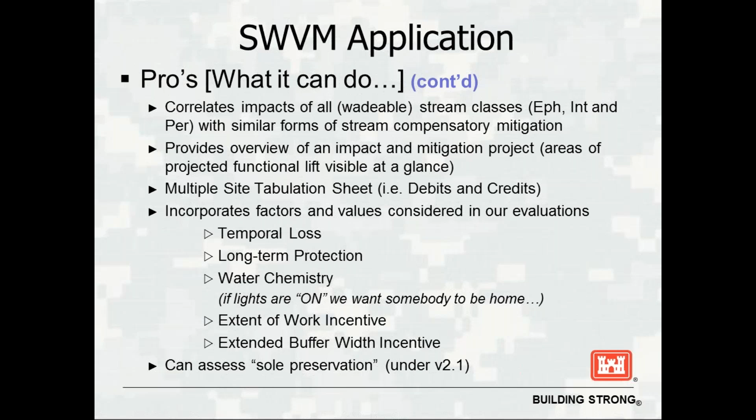I know the screen is hard to read, but the SWVM is available on the web, either through the Pittsburgh or Huntington websites. If you cannot access them, feel free to send me an email, and I can send you the SWVM. It's basically an Excel spreadsheet.

The top half of the spreadsheet is basic information: lat long, where the project is, mitigation length. But we'll go over the columns.

The first column is the impact, so that is the area that you're actually filling. In most cases, it's a fill. The second column, if you're doing permittee responsible mitigation, that would be the area you're going to do your project in; it's baseline conditions. And the last column is what you project that project to be at maturity.

The top half is the HGM, middle half is EPA's rapid bioassessment for habitat, both the high gradient and the low gradient. The next section deals with water chemistry: conductivity, pH, and dissolved oxygen. And then the final section evaluates using the West Virginia Stream Condition Index, which is an aquatic benthos index.

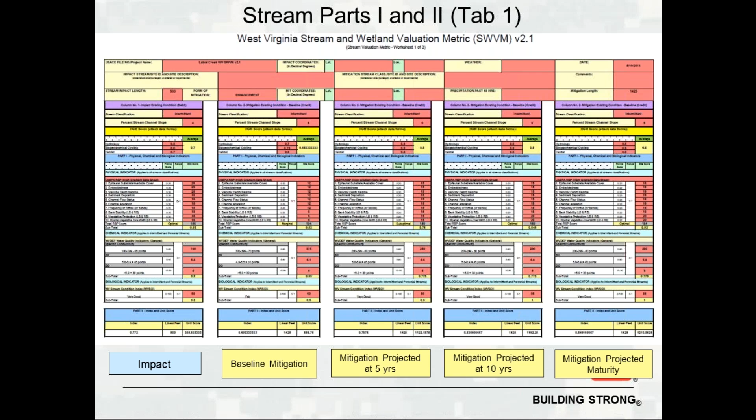Just a little bit of a close-up, like I was saying before. It's broken up into four sections. The top half is the HGM, which was developed by the Corps of Engineers at the ERDC lab. Then EPA's rapid bioassessment protocols for wadable streams, West Virginia DEP's water quality indicators, and our West Virginia Stream Condition Index, which is basically an IBI for aquatic insects.

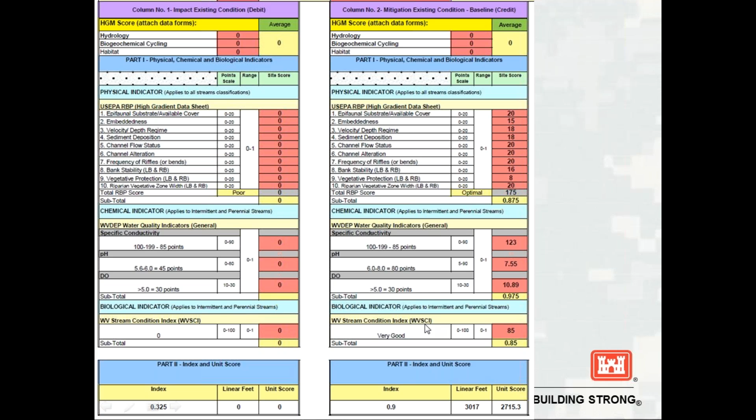If you go into the actual SWIM, there's a second page, which goes into some of the incentives or some of the other fields that go in there.

Temporal loss to construction, which is basically if you have a project and it's going to be 2 years before you're able to start your mitigation, you would put 2. If you're going to do your mitigation concurrently, it would be 0. If you're going to use a mitigation bank, we allow you to put 0 into that field.

If you're going to use the in-lieu fee program, you would put 4 years into that space, basically because it generally takes our in-lieu fee 2 years to get the ball rolling, another year or so to actually get the project on the ground once they receive the monies. So you're looking at about 4 years delay between the time the impact happens and the time mitigation actually gets put on the ground.

We also have temporal loss to maturity. This is basically for permittee responsible mitigation projects; that is a 0 if you're using banks or in-lieu fee. This is basically for the credit side of things, so when you're trying to calculate the credits or the debits that you're responsible for. And there's a long-term protection.

So basically we've determined that long-term is 100 years, so anything over 100 years we consider forever. But in West Virginia, given the amount of mining and stuff we have, we can't always have 100 years of protection. So there is an avenue that if you only have 20 years of protection, but there is a penalty to pay.

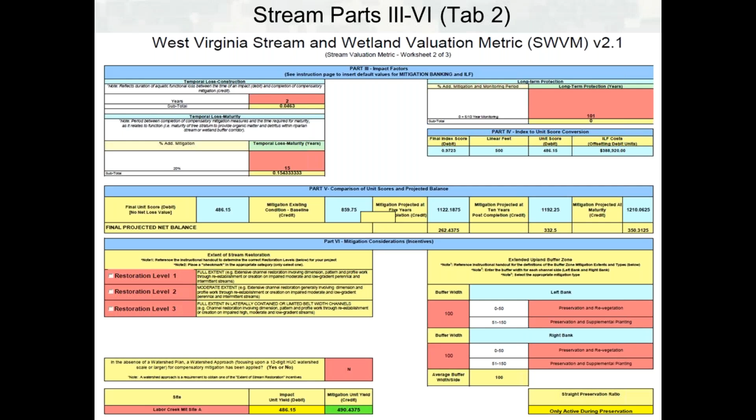The other part of this is the HGM, which was developed by ERDC. It is a bit more data intensive, where you actually collect data and put it into a spreadsheet, as opposed to EPA's rapid bioassessment, which is a visual assessment leading to a bit of judgment. The HGM doesn't have quite that level of subjectivity.

What it also allows you to do is sort of double check. So if your HGM says you have a very high quality system, but your EPA rapid assessment says it's marginal, it gives you a good indication that you need to look at it a little closer. But it's split into hydrology, biogeochemical cycling, and habitat.

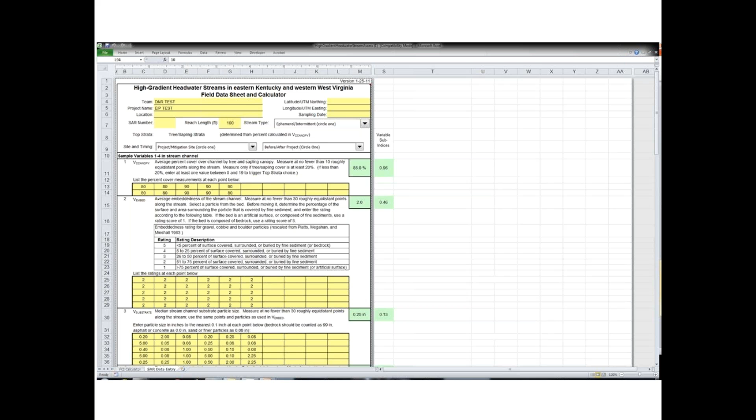Now, as you can see on the HGM screen, it is data driven. So as you enter the data, the spreadsheet will actually calculate the values for you. It's pretty simple to fill out, and a relatively simple time frame of getting that information in there.

Like I said before, it's broken down into physical, chemical, and biological, basically using aquatic insects in the physical parameters. Scored on a basic 0 to 1 scale, 0 being the LA ditch, and 1 being your standard reference streams.

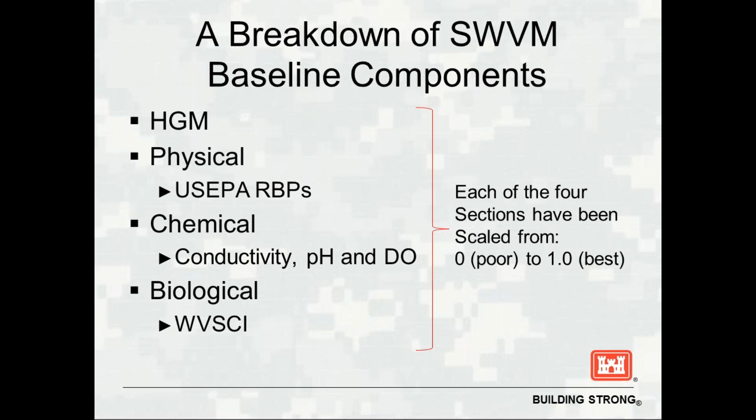Once you put all the information into the spreadsheet, it will actually calculate your debits and credits, but it's based on a percentage of each of those components. If you use the HGM part, it's 50% HGM, then 50% the rest of the SWIM, and then within that SWIM, it's 1/3, 1/3, 1/3.

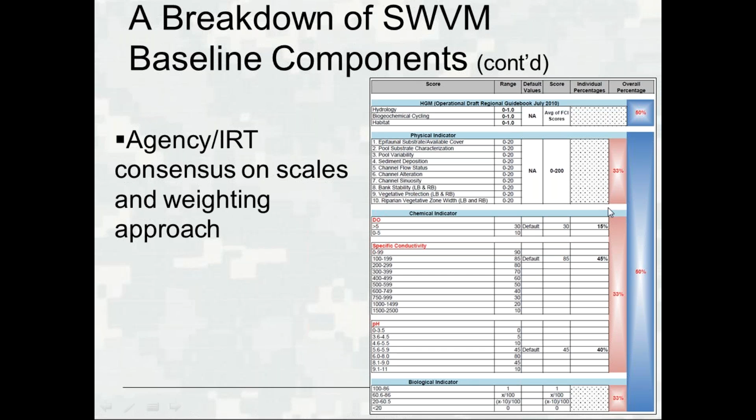Just giving you some breakdowns of how we calculated that. Don't need to go over that line by line, but probably the key to look at is the restoration levels. So basically, once it grinds the numbers, it goes to the incentive levels.

So if you're doing level 1 restoration, we basically give you a 100% jump. And that was to strongly encourage our consultants to do high-level restoration. So if they're doing changes in dimension, pattern, profile, they're going to get more credits for their work. And fully realizing that requires quite a bit of front-end work on the design.

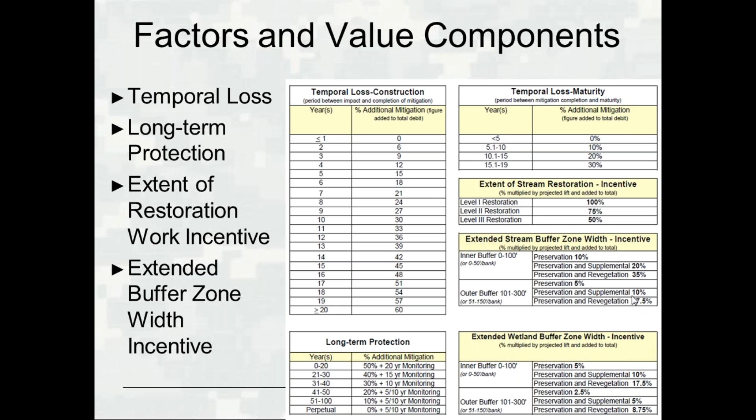Try to incentivize them to actually do the design that they need to do. Again, we're not going to accept level 1 restoration on an ephemeral high gradient stream, and just giving you a little bit of idea of what those incentive levels are and what it takes to get those incentive levels.

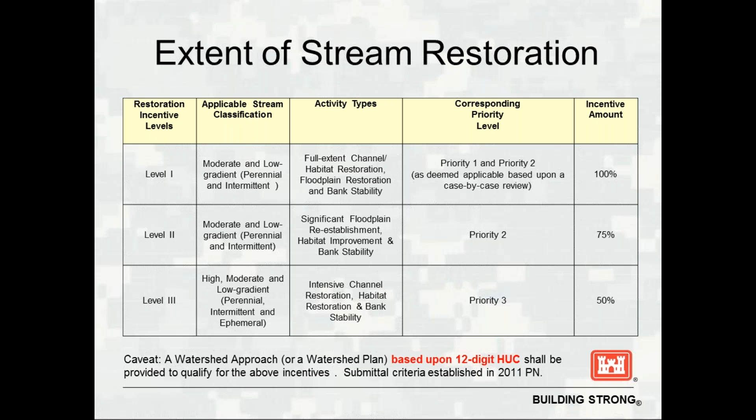Most of our consultants on our mitigation banks are doing level 1 restoration. Probably 75% of the bank will be level 1 with about 25% on level 2. Our permittee responsible mitigation projects generally focus more on the level 2 and level 3 restoration.

We do allow stream preservation to generate credits, and that's based on a ratio based on the value or the functional value of that stream. We only accept for preservation streams that score 0.80 or above. So these are very high quality systems. And with the higher quality, the greater credit that are generated.

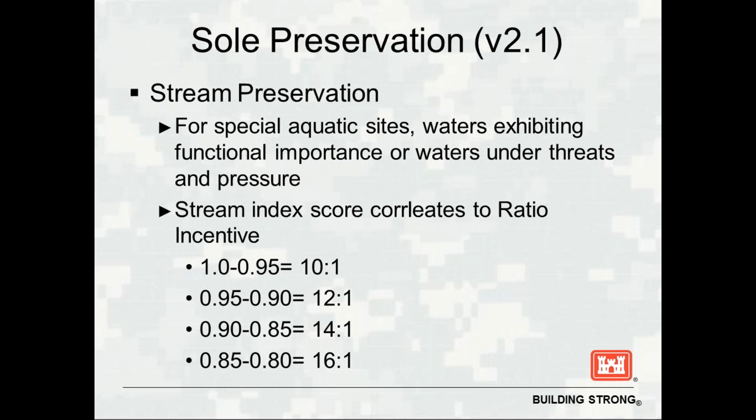We generally try to stay, we don't want any of our banks to have more than 30%, give or take, of the total credits being generated by preservation. We can, on exceptional systems, go higher than that, but generally 30% is our rule of thumb on the amount that we want our banks to have in preservation credits.

And that about does it. So, the total goal is to try to get cows out of the stream and restore our systems, and adequately compensate the state and the citizens for impacts that occur, whether it's mining, pipelines, or Walmarts.

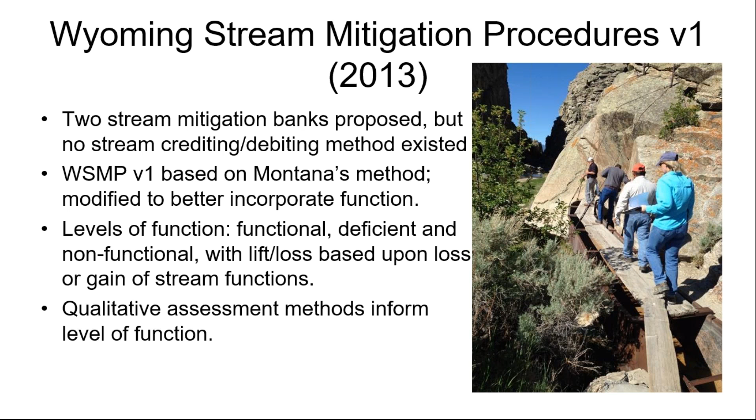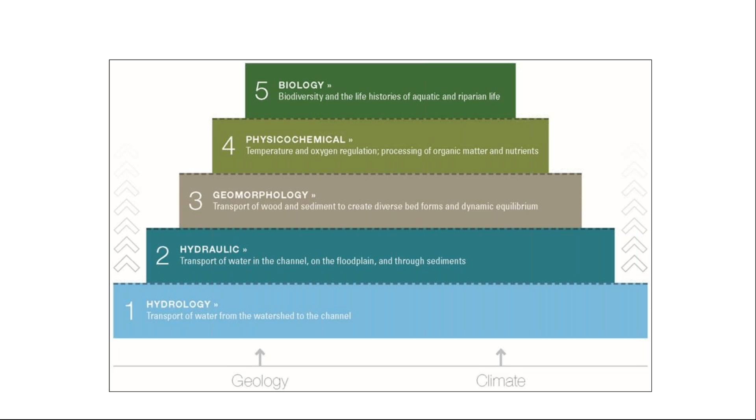The IRT really liked this approach and felt like it represented a good organizational framework and a really good communication tool for thinking about the various functions occurring in streams, and really thinking about ways that these functions are interrelated. So for those not familiar, this is the stream functions pyramid mentioned in this document. It's an organizational framework to help think of the various functions that a stream provides and how the various functions relate to each other within a stream system.

So here's what the original Wyoming stream mitigation procedures looked like.

And can you guys see my pointer? I don't know if you can, but essentially on the debit side... We can see your pointer. Yeah. Excellent. Okay.

So we looked at using these qualitative assessment methods to define what the existing condition was in these three categories: non-functional, deficient, or functional. And then we looked at the type of loss as it related to functions. So partial functional loss would be one or more stream functions degraded by an impact. Full functional loss would be that most of the functions would be impaired or lost at an impact site.

And then similarly on the mitigation side, we looked at incorporating multipliers for net riparian and stream improvement tied to the magnitude of lift that we anticipated at a site. So substantial was defined as moving from a non-functioning category to a fully functioning category of condition. Moderate would be moving from non-functional to deficient, or deficient to functional.

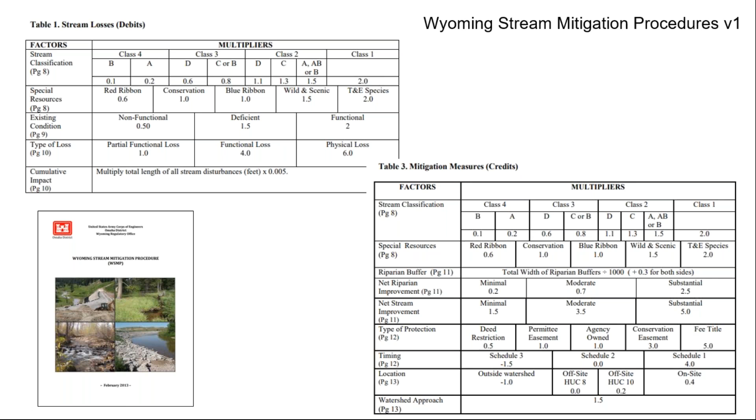So how did this work out for us? Once we developed the stream mitigation procedures in 2013, one of the banks moved forward to develop and finalize their mitigation banking instrument. And as we were working through the MBI process, there was some discomfort on the IRT in relying on these qualitative assessments alone to inform how much lift was happening on the site.

These qualitative methods are fairly rapid and subjective, and they lack repeatability from one practitioner to another. And so there was some level of discomfort in relying on this for the mitigation bank site to receive credit for the lift they were anticipating.

And so what we ended up doing for the mitigation banking instrument was adding quantitative performance standards that would support the assessment conclusions. So we looked to the stream functions pyramid framework document for ideas, and we pulled out some quantitative measures and incorporated them as performance standards within the banking instrument.

And then after the bank was approved, collectively, I think the IRT thought, well, there's got to be a better way that we can do this. And so we kept talking about the need for moving to more quantitative approaches to describe stream function. And around the same time, Will Harman with Stream Mechanics had been working with the Environmental Defense Fund in North Carolina to develop a stream quantification tool, which was really a spreadsheet calculator that was an outgrowth of the stream functions pyramid framework work that he had done.

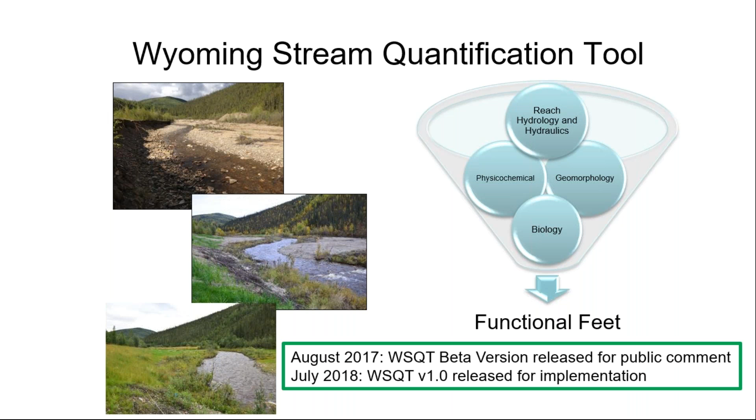So we started this process, I think, back in 2016, and by August of 2017, we had a beta version of the Wyoming stream quantification tool. We released that for public comment and beta testing, and then made some pretty substantial revisions following that period. We got a lot of really good, meaningful feedback from folks, and were able to make some very constructive revisions to version 1, which we released last July for implementation in Wyoming.

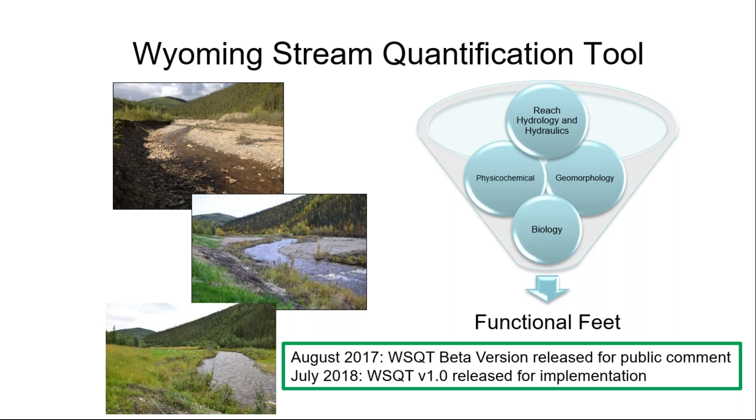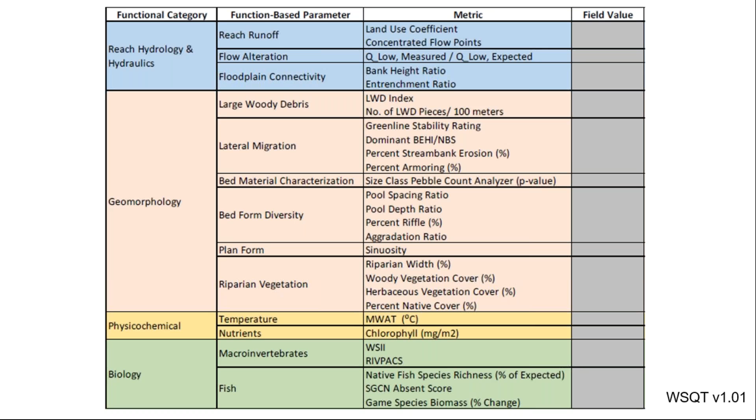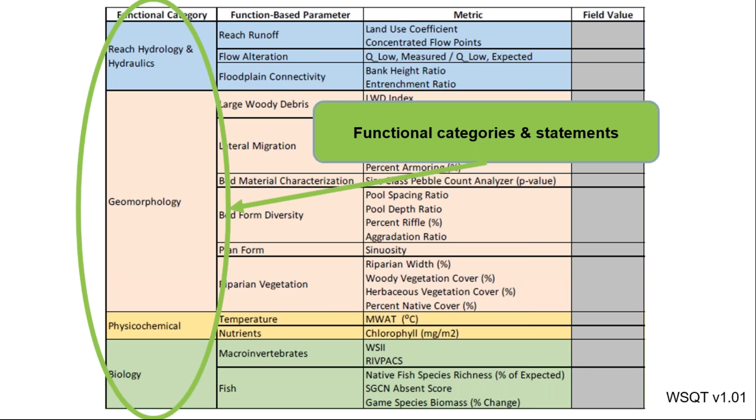And so just a quick tour of the stream quantification tool. It's organized very similar to the pyramid itself. So here you have your functional categories. In the Wyoming stream quantification tool, we combined the hydrology and hydraulics so that we had a more balanced approach to scoring. So we have 4 functional categories.

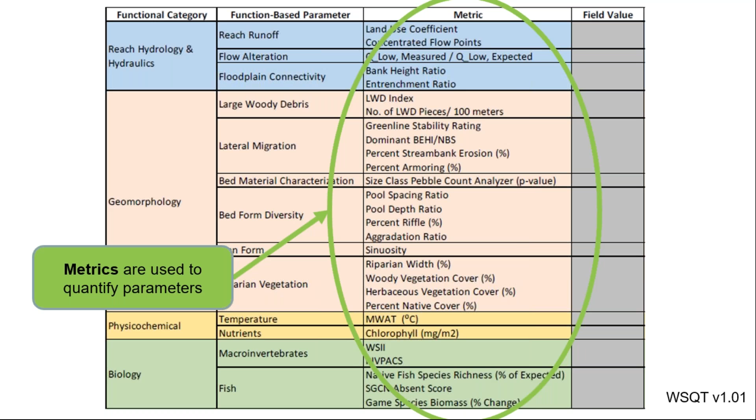And then within each of the functional categories, we have multiple parameters. These parameters describe and support the functional statements. And then for each of the parameters, we have metrics. Metrics are the actual measurements that you take in the stream to generate the score. And so these are the various metrics that are included in the Wyoming stream quantification tool. And then lastly, when you enter a field value, it converts it to an index value. And we have reference curves that we used.

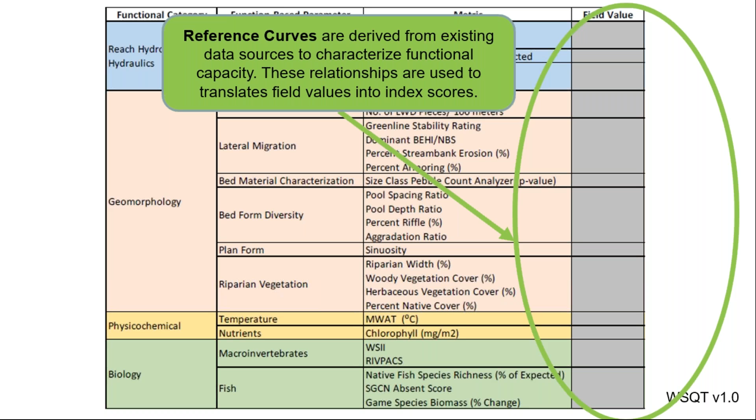We derived these from existing data sources that characterize the functional capacity of the system. So basically, it translates all the field values and all the different measurements from these different metrics and approaches and assigns them an index value on a 0 to 1 scale, 0 being no function is provided, and 1.0 being the tip-top reference standard condition. And so this is really data-driven, which is exciting.

And so the way that scoring works in the tool is pretty simple, so that we have the flexibility to add and subtract or adjust the metrics based on specific project goals and objectives. Or, in the future, when we update the tool, we don't have to go back and rework all the scoring based upon how things balance in there.

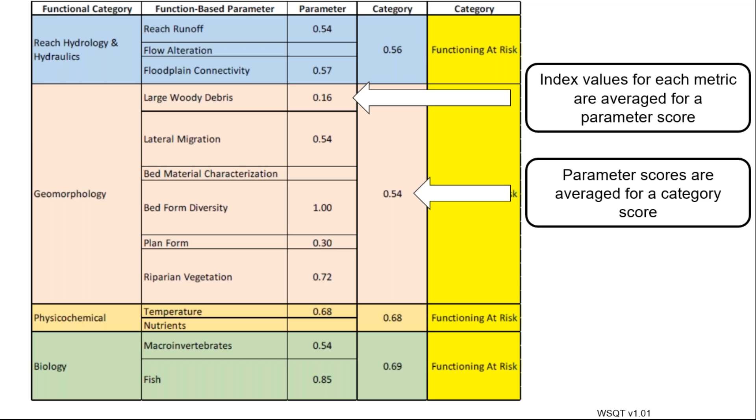So it's pretty straightforward. Index values for each metric are averaged for a parameter score if there's more than one metric within that parameter. And then the parameter scores are averaged where more than one parameter is filled in to get a category score. And then the category scores are weighted and summed to create an overall reach score. So reach hydrology and hydraulics is 30%, geomorphology is 30%, physicochemical and biology are 20% each.

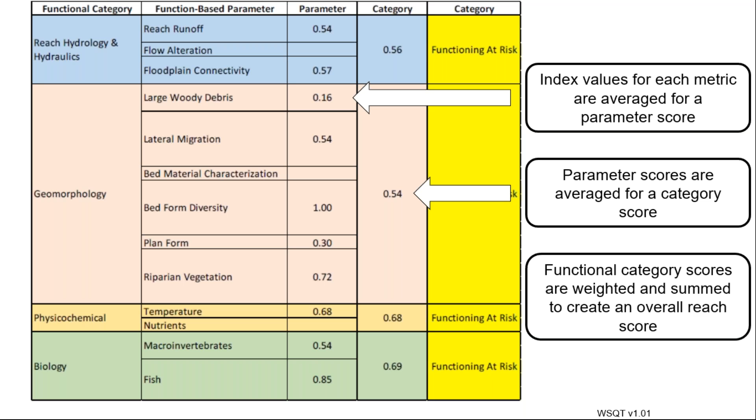If physicochemical and biology parameters are not measured, then that limits the overall potential score that you can achieve to 60% of the total. So this, in a way, incentivizes people to monitor physicochemical and biological parameters at a mitigation or restoration site, so that they can get credit for achieving lift in those categories as well.

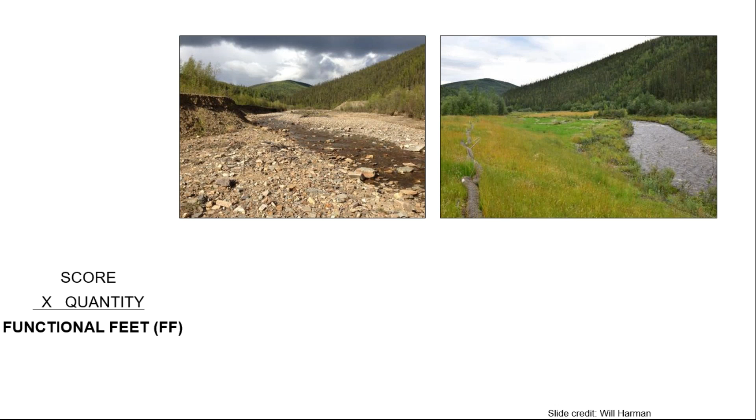And so just to walk through an example, I mentioned that functional feet was calculated by taking the score and then multiplying it by the project size. For the purposes of this, we use stream length. So here you have a site. This is an example of Wills from up in Alaska. The existing condition score at this site came in at 0.21, and the existing stream length was 1,600 feet. You multiply those together, and you get a functional foot score of 336 functional feet.

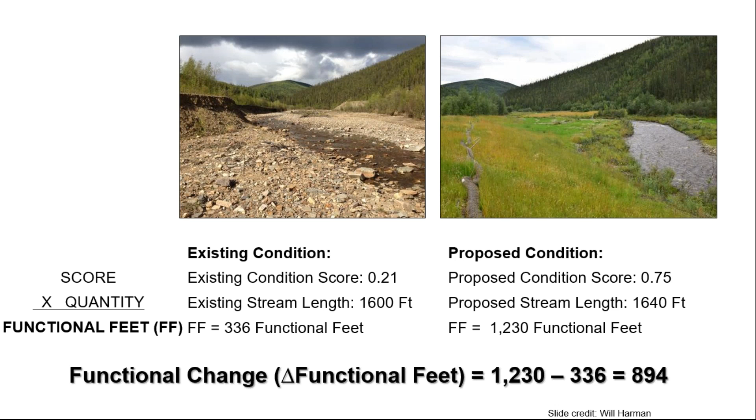So the proposed condition was much higher. The proposed condition score was predicted to be 0.75. Because of the work that they did, they added an additional 40 linear feet of stream, which led to a proposed condition functional foot value of 1,230 functional feet. And so what we do with that is we look at the difference between the proposed and the existing condition scores, that delta, to calculate the functional change. In this case, it's 894.

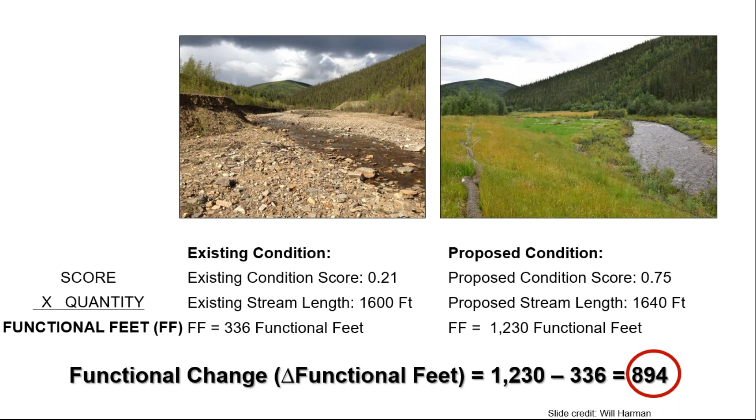And that delta, or that change in the functional feet, becomes the basis for talking about debits and credits now in Wyoming. So just a general summary of the SQT. It's really intended to calculate functional loss and lift associated with stream impacts and restoration projects by quantifying changes between existing and future stream condition of the site. It is intended to look at the difference between an existing and a proposed condition score to inform permitting and mitigation decisions. It can also be used to develop monitoring plans and set performance standards.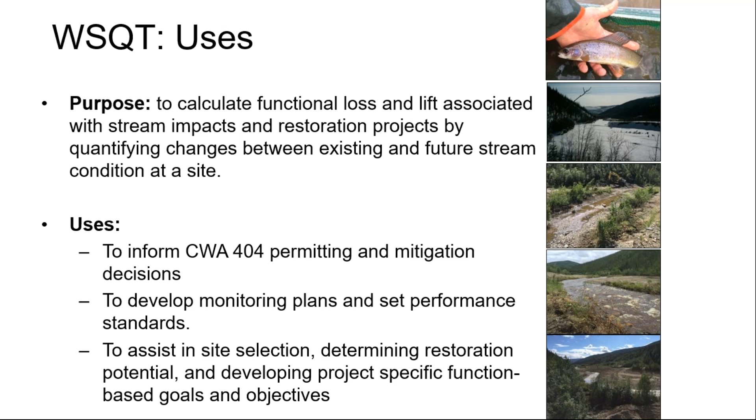It also has other uses that relate to planning of project sites and setting project-specific function-based goals and objectives. All of that is also outlined in the user manual for the SQT. So as I mentioned, the SQT itself is a workbook that is used and applied at a specific project site. There are a few things that accompany the SQT. One is the user manual, which explains how to enter information into the spreadsheet, and it also includes information on how to collect data at a site and calculate the metrics that go into the SQT.

We also have the scientific support document, which explains how we derive the index values for each of the metrics in the tool. I mentioned the reference curves, and this document really explains how we developed the reference curves, defined the index values, and it also provides other background on how things are weighted in the tool. And then, importantly, the tool needs to have a place where it sits and a document that explains how it's going to be used.

So once we developed the stream quantification tool itself, the team went back and revised the Wyoming stream mitigation procedures. Version 2 of the Wyoming stream mitigation procedures rolled out along with the tool in 2018, last summer. And this is just a look at what the new table in the stream mitigation procedures looks like.

So the SMP version 2 still includes a table that looks at adjustment factors for debits and credits. It's been simplified. We took out a lot of the things that we thought were already accounted for in the tool. For example, buffer. We have a riparian width metric, so the width of the riparian area that is protected and restored is accounted for in the functional foot calculations within the tool. And so that was something that we were able to take out of the adjustment table.

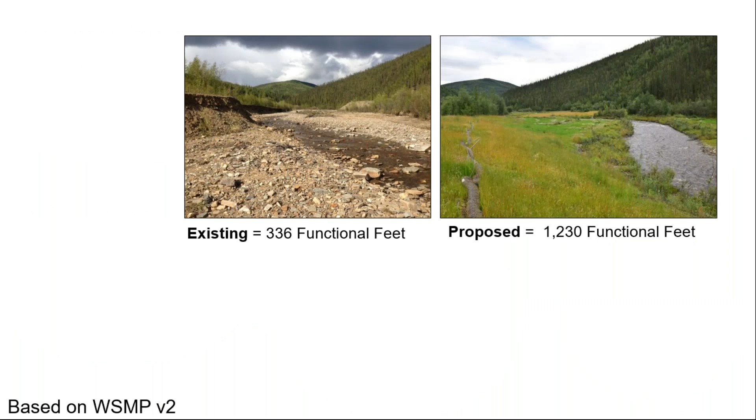So if we go back to the example that we walked through before and run it through as a mitigation scenario. Let's say this is a proposed bank site. Let's say it's in a conservation watershed. The sponsor is going to apply a conservation easement with an additional buffer area that extends outside of the riparian width. And they're also proposing that 20% of credits be available as advance credits. Let's figure out what credits they would get at the site.

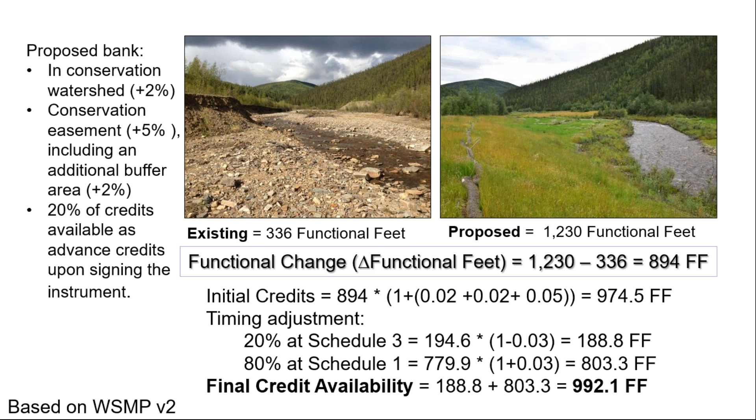As I mentioned, the foundational unit is this change in functional feet, and that's 894 functional feet. Then we would take that and consider the multipliers, the 2, the 5, and the 2%. And so you would get an adjustment factor on that. And then you have your timing adjustments based on the various schedules of credit availability. So essentially your final credit availability in this example would be 992.1 functional feet. And that is the amount of credit that you would have at the site.

And so that is really all I have to present to you today. I look forward to answering any questions.

Thank you so much. That was a really great review of the methodology. I do have a few questions for you, Julia. The first is, who measures the baseline water quality parameters? Is it the consultant or the state? And if it's the consultant, are they given state-approved water monitoring protocols or QA/QC procedures?

Yeah, so it would be the practitioner that would collect all the baseline data at the site. The user manual for the Wyoming stream mitigation procedures includes Appendix A, which includes all the data collection methods. A lot of these were pulled directly from Wyoming DEQ standard operating procedures, which have QA/QC protocols incorporated. Great, thanks. Hope that answers that question.

And then there's another question about the adjustment factors: is there documentation for the adjustment factors? Is that included in the procedures as well? Yeah, so the stream mitigation procedures document defines all of the various adjustment factors and how the percentages would be applied.

Excellent. Okay, so roughly how long would you estimate that it would take to develop and implement this approach in an area that currently does not have it? So how long was the process? So the process in Wyoming took us probably two years, I think, from the start to having an implementation version of the tool. In Colorado, we're currently building off of Wyoming's tool. From when the Wyoming version 1 came out, we're probably a year behind them. We're about to put out the Colorado version of the tool.

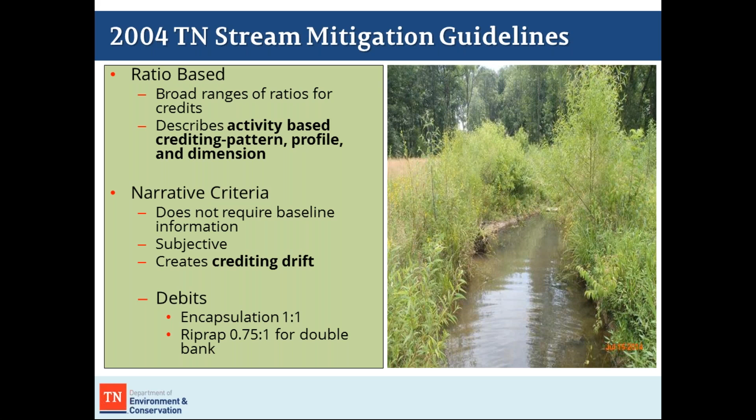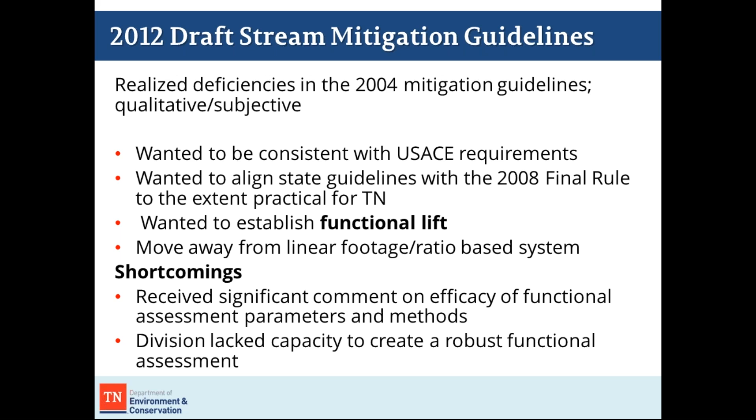We rewrote the stream mitigation guidelines in 2012 and released them to the public, and it didn't go over so well. We did it because we wanted to try to be consistent with the Corps requirements and align with the 2008 federal mitigation rule. We wanted to establish functional lift and move away from a linear footage at ratio-based system, but we didn't do it as a collaborative approach, and we therefore lacked the capacity in-house within the state to create a robust functional assessment system. So we had to go back to the drawing board.

And when our leadership approached us with this issue, they really said we needed some strategic planning in order to implement a good program that captured everybody's goals and was inclusive of all of our stakeholders. We have customer-focused government, so including our customers in the process was a priority.

So we worked on a method to engage our stakeholders before we selected the methodologies that we were going to use. And then we worked with the IRT to evaluate all of the potential assessment methods that were out there. And then we established parallel pathways. While we were developing the tools and gathering data, we were also routinely doing education and outreach to our stakeholders and our internal staff so that everybody knew what was happening and when.

It took us about 6 or 8 months through the IRT exploration process to select the stream quantification tool that Julia described as our primary option, as our go-to option for really becoming the tool to help us evaluate credits and debits. The benefits of the SQT was that it was numerical, and it determined the difference between existing and proposed condition.

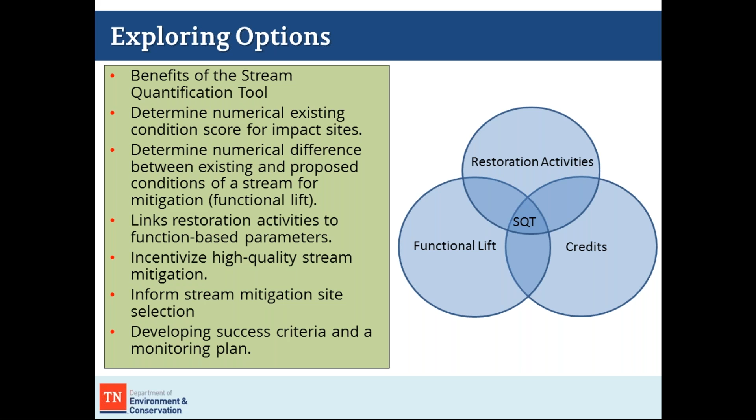With that tool in mind, we developed a suite of long-term and short-term goals to help us complete the process. I know one of the questions in the audience was, how long did this take? For Tennessee, it's taken us 6 years.

We have a robust permittee lobbying group. Our Department of Transportation and other impactors are really robust and active and wanted to be part of the process. We had a lot of political interest in the process. And then we have 2 separate Corps districts, the Memphis district and the Nashville district. We had to make sure that collaborative partnership was aligned, and then all of the other agencies that were involved.

So with that in mind, our long-term goals were really to develop a tool that could work for all, and it was a stream function assessment to capture lift and a companion debit calculator. With that, we knew we needed to update the stream mitigation guidelines, and we wanted to update TDEC rules on mitigation. This would require 2 sets of rule changes, the water quality standards and the aquatic resource alteration permitting rules.

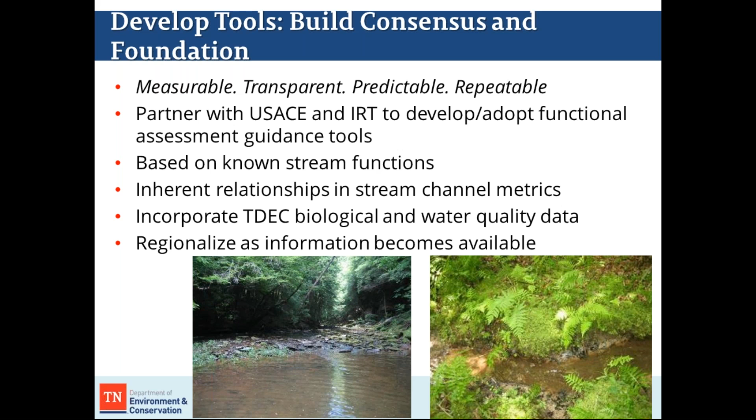So first off was to develop tools. For our stream quantification tool, we knew that we wanted to gather data that we already had and partner with the IRT and other agencies to access and use that data to build our reference standards, and also collect data that we didn't have. And that was going to help us regionalize the SQT to make it unique for Tennessee.

In our data gathering and analysis efforts, we spent about 18 months building regional curves, hydraulic geometry relationships, collecting information on unique bed forms across the state, riparian vegetation, and then mining the data that we had for biology and water quality for about the past 20 years.

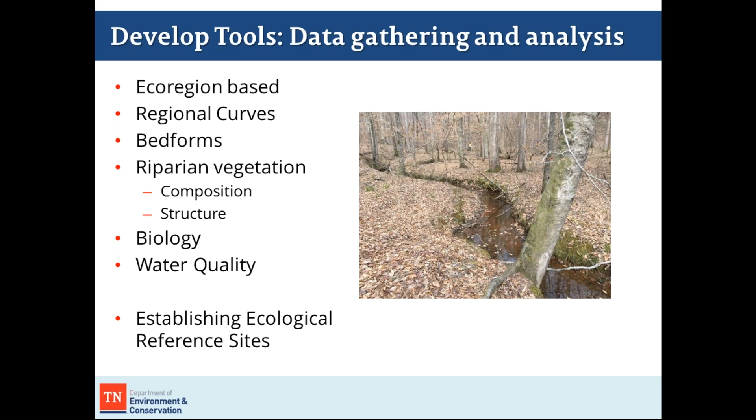We also collected large woody debris information, and once we had our regional curve sites established, we went back and collected biology and water quality at those sites also, establishing ecological reference sites.

So with that, we had over 120 ecological reference sites across the state with multiple levels of data. Some were primarily morphological, some primarily biology and water quality, but nearly 60% of those sites have reference data for all 5 stream categories, from hydrology all the way down to biology. It was important for our leadership that they felt we had a robust set of data to build our reference curves on for the stream quantification tool.

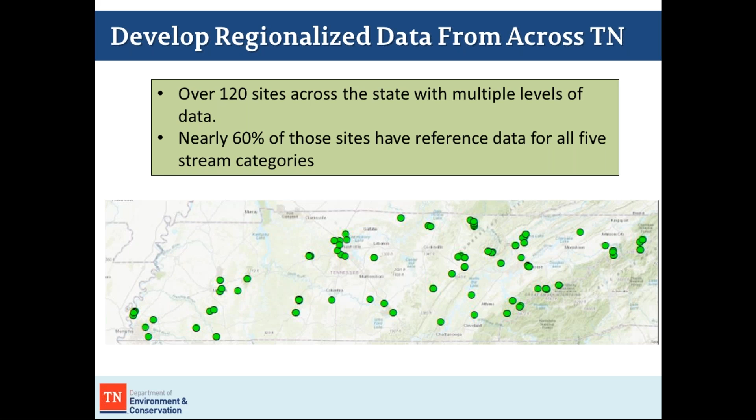Once we had the data, we began to build those reference curves that Julia talked about, and it was an iterative and incremental regionalization process. So what that meant was, after we had determined as a team what stream category parameters we were going to use in the SQT, we had a mitigation assessment team, an internal working group with the IRT, pore over the data and help develop those curves based on the information that we had.

We reviewed and analyzed existing data, gathered new data, and once those reference standards were established, we would send that information out to the Stream Design Review Group and the members of the IRT. Those groups would review that information and give us feedback, and then we would refine those curves and build that information into the tool. We had several beta versions of the tool that we public noticed. I think we had 2 rounds of comments on the SQT before the final version was released.

For streamlining the process and communicating change, we developed a series of workshops that we delivered across the state for all stakeholders that focused on small changes and also introduced the concepts of the big change to keep that open line of communication. We had webinars where Will Harmon actually provided the education. We had workshops where we took practitioners in the field and discussed measurement methods. And we slow walked the process so that everybody felt comfortable.

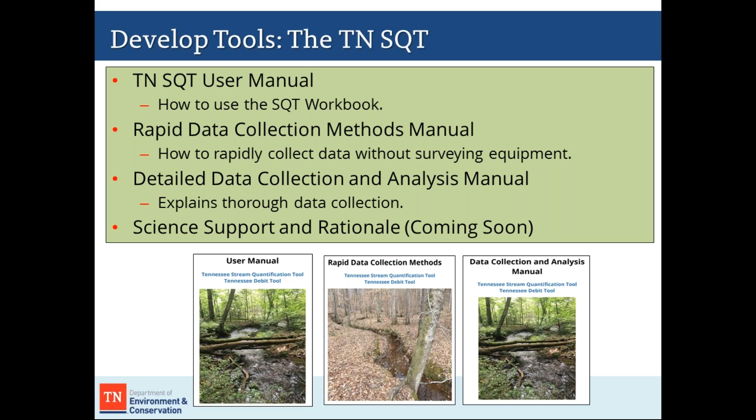I know that there was a question in the audience about the time commitment for collecting the data. The rapid methods, we say, takes approximately 2 hours. The water quality and biology component of that can be collected by the state. If the practitioner would like to collect that data, the manual describes how you need to use the TDEC QSSOP for macroinvertebrate data collection, and make sure that you're a qualified biologist able to conduct that assessment. The detailed method, that's about an 8-hour process.

Our Tennessee stream quantification tool looks very much like Wyoming's. For our workbooks, we have multiple tabs where, with the project assessment, a watershed assessment page, your parameter selection guide, which tells you based on your site if you should be using parameters for large woody debris or bed form diversity. The quantification tool itself is the actual calculator, and then we have additional tabs that allow monitoring data and a data summary of your site over time, followed by the final tab, which is reference standards.

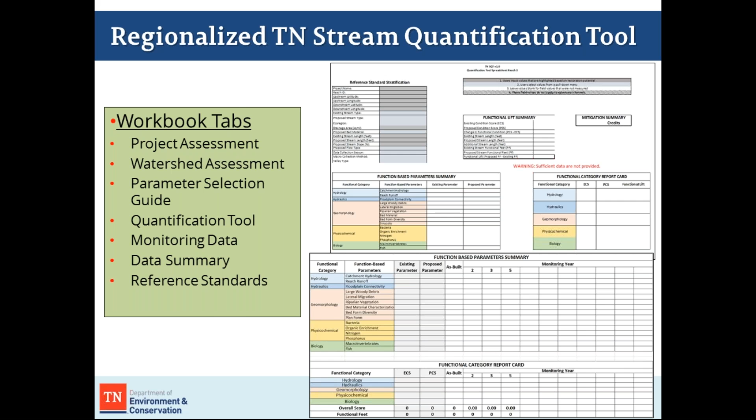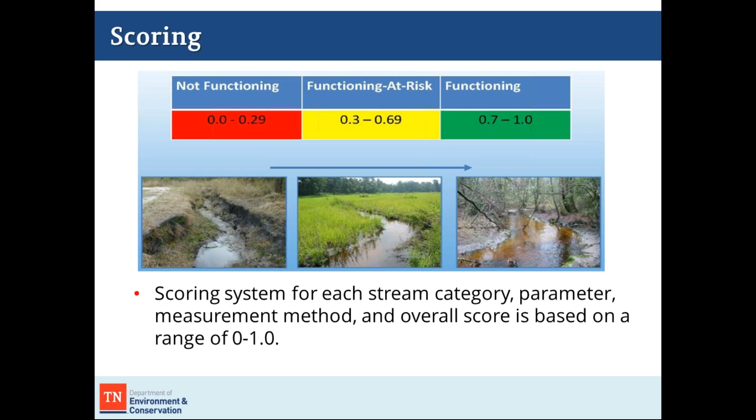Our scoring is just like Danny and Julia's. It's on a 0 to 1 scale, and it's broken into easily recognizable color categories of red, yellow, and green for not functioning, functioning at risk, and functioning. This is important to remember when we discuss the Debit tool in a few.

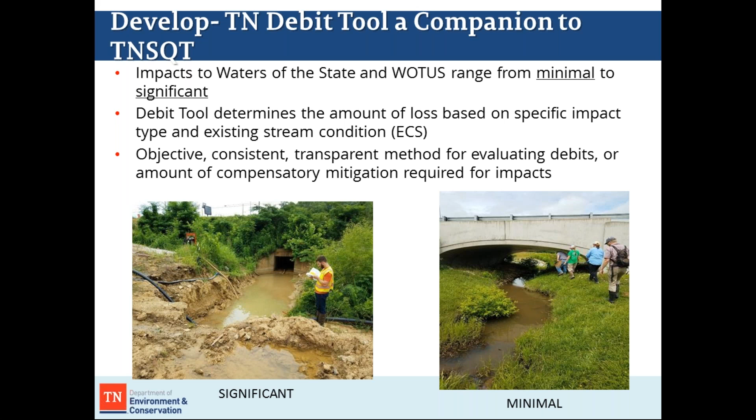So when we had the SQT finished, it then became apparent that we needed to develop a companion tool, because expecting applicants to go out and use the stream quantification tool to project the functional loss at their site may be more challenging than we wanted to make it. So we did a very similar process based on the same logic model as the SQT, but kind of in reverse.

The Debit tool is a spreadsheet calculator, just like the stream quantification tool, and written guidance. It has two additional components, though.

It has something called an existing condition score, which you have for the SQT, but what we have here is an ability to either complete all of the metrics, or option 2, which is probably going to be the most popular option for applicants, will be estimating your field assessment scores, which means you gather data for some metrics but not others.

And then if you're not capable of collecting all of the data based on skill or time, you can take the standard existing condition score, and we tier that for a 1.0 for exceptional Tennessee waters or outstanding national resource waters. A general stream would have an existing condition score of 0.8, and an ephemeral channel of standard condition would have an existing condition score of 0.32.

You couple the existing condition score with the impact severity tier, and that is tiers of impacts based on type and description and projected functional loss, to get the debits that you would be owed.

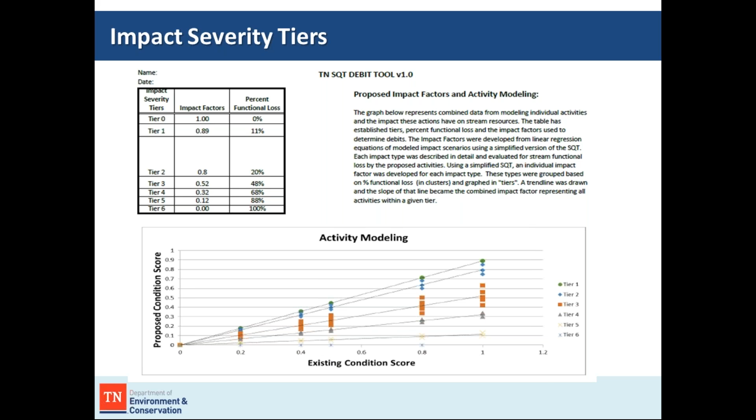The impact severity tiers were developed through a combination of modeling of activities to determine functional loss, and then some regression equations to develop impact factors based on those activities. And I'll just briefly buzz through these.

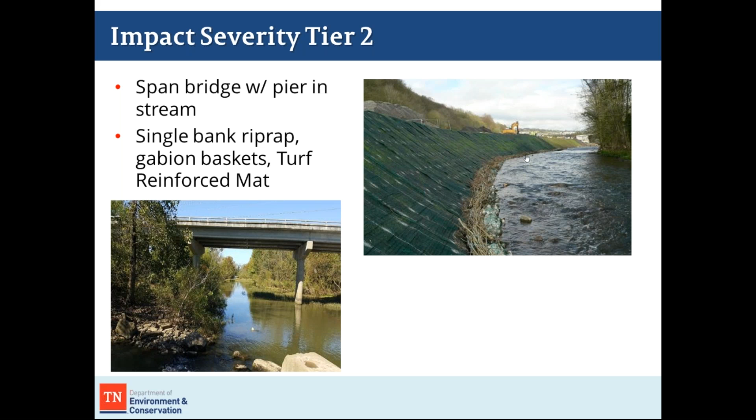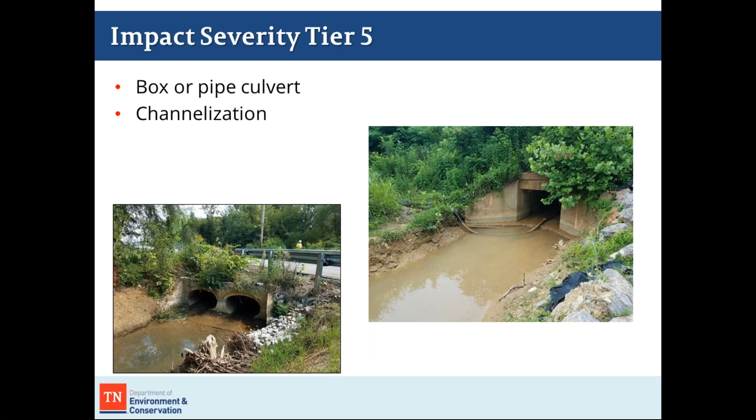We have tiers ranging from 0 to 6 that represent minimal to no loss. And as you climb in number for impact severity tier, so does the amount of loss that you will see occur for the resource. I didn't list impact severity tier 6 because that's basically stream fill.

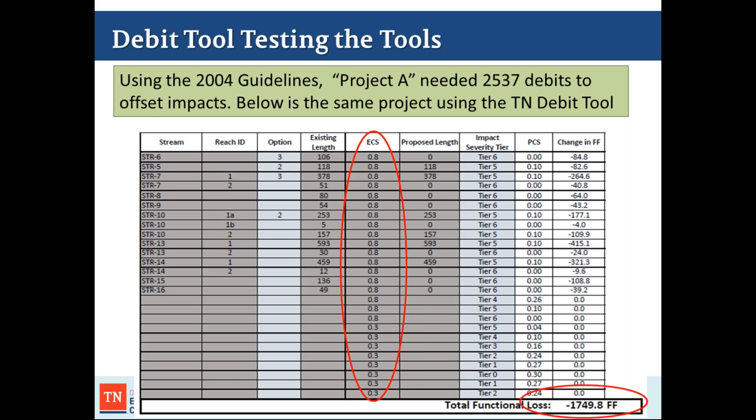We tested the Debit tool with a whole bunch of the Department of Transportation projects to see how it worked. We saw that under the 2004 mitigation guidelines, a project needed 2,500 debits. Using our model that helps better capture functional loss at an existing condition score of a high quality stream, the debits went down significantly. Once we did an estimated existing condition score, that option 3, and measured some parameters but not others, we saw an even bigger drop.

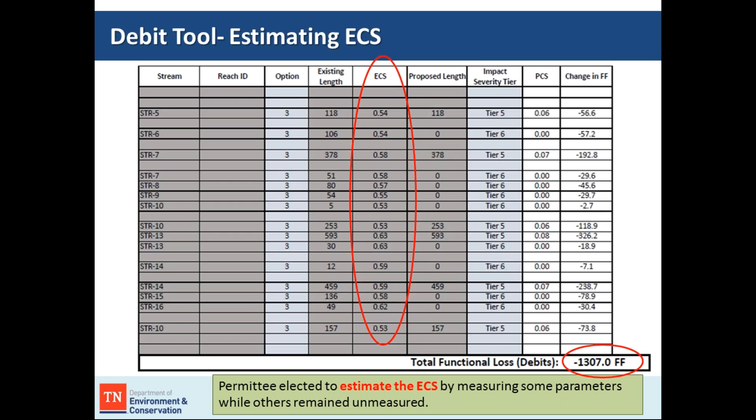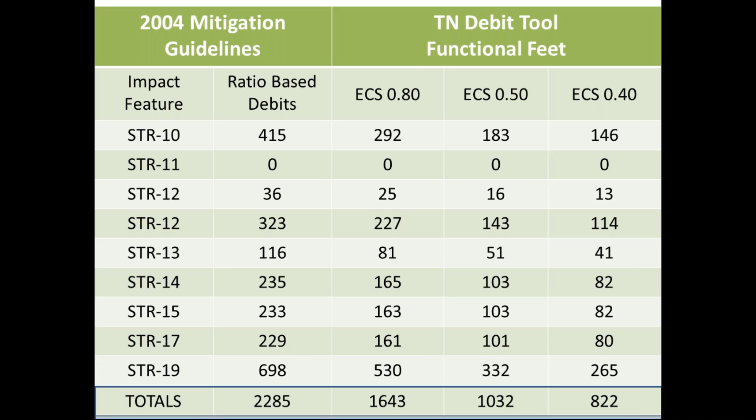Reviewing more projects, we saw that we could capture, based on existing conditions, significant amounts of difference between the 2004 and the new guidelines, which the Department of Transportation appreciated.

And then we used the same process to look at compensatory mitigation projects to see if they had an equitable amount of sensitivity to determine if we could evaluate whether or not they were seeing enough lift.

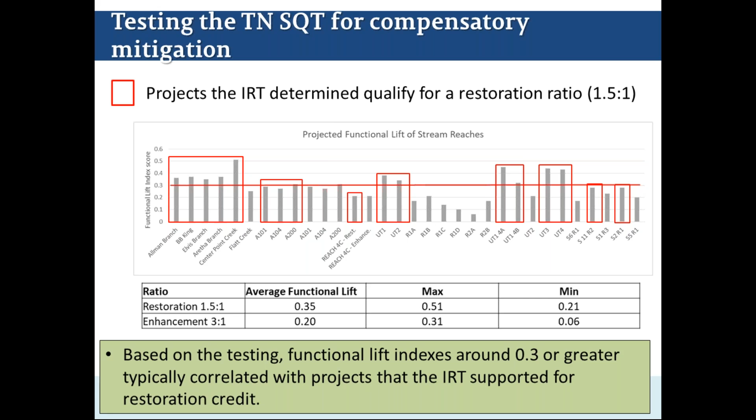The red box indicates projects that we, as the IRT, would have given a 1.5 to 1 ratio, full restoration. And you can see that evaluation of the SQTs determined that not all of the projects were rated equally. In fact, we had some that proposed really high lift, while others a minimum of 0.21, low.

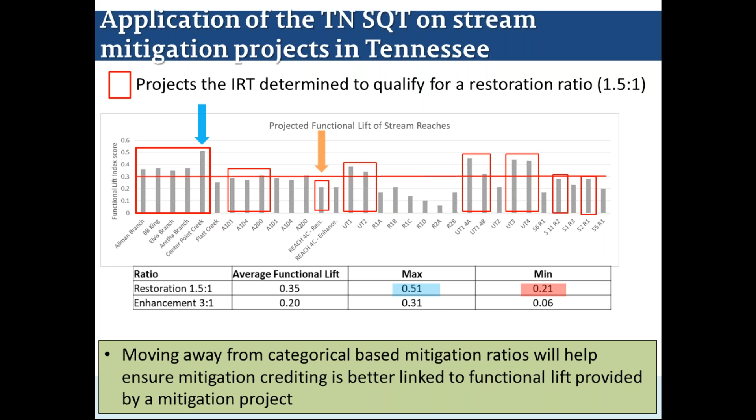So this system will really help us move away from the categorical-based mitigation ratios and ensure that crediting is better linked to functional lift by the mitigation project.

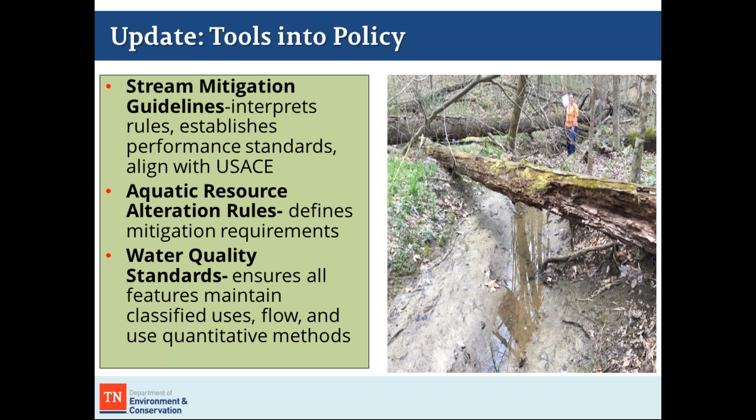We also had to update the mitigation guidelines, aquatic resource rules, and the water quality standards. And we feel like we hit a home run with the guidelines, plotting out everything that we wanted to change.

Two big things that we changed in the rules. The rules now say that resource value compensation has to go through a quantitative assessment or other scientifically defensible method. And at a minimum, all new and relocated channels, including mitigation watercourses, must maintain or improve classified uses and flow.

So we've really accomplished most of our long-term goals and our short-term goals, except for finishing the stream mitigation guidelines, which are due to release in the next couple of weeks. And we hope that the aquatic resource alteration rules will be approved by August.

This has improved our market and coverage for mitigation banks across the state. We have over 38 banks pending now, so this represents historic and new, and we feel that that's a real testament to the validity of the process.